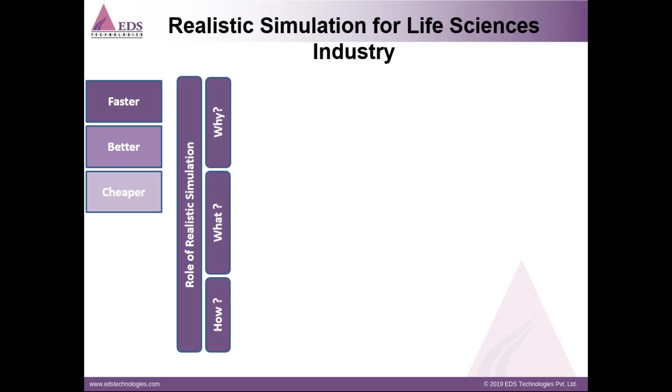All these industry challenges and demands mainly call for shorter time to market, more competitive products, and lower product costs. A realistic simulation can play a significant role in achieving these goals. Simulation can help design exploration by changing the material choices and geometries, and also manufacturing tolerances, to predict the device's durability, reliability, and potential failure due to fatigue.

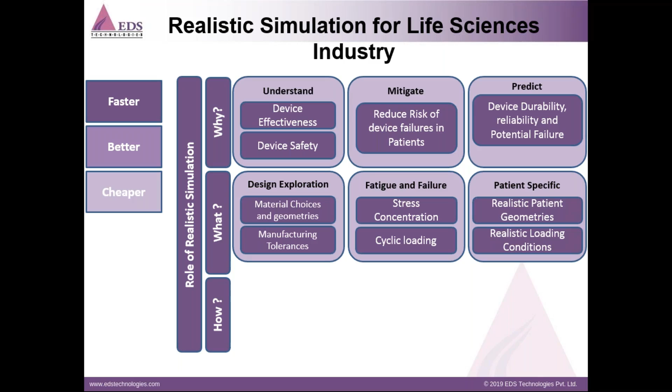To reduce the risk of device failures in patients, patient-specific simulation can be implemented by using realistic patient geometries and realistic loading conditions, and all of this can be achieved by realistic simulation and durability evaluation.

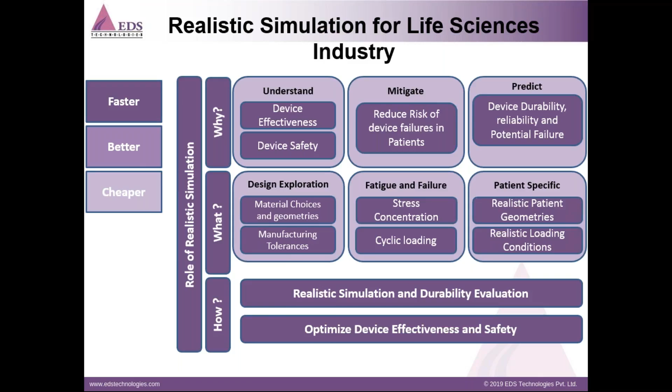Simulia has a large footprint in the medical devices industry, with more than 100 commercial customers that cover mainly various segments within the medical device industries, including but not limited to cardiovascular, orthopedic, drug delivery, vision care, hearing care, surgical equipment, dental, pharmaceutical, medical imaging, as well as wound management.

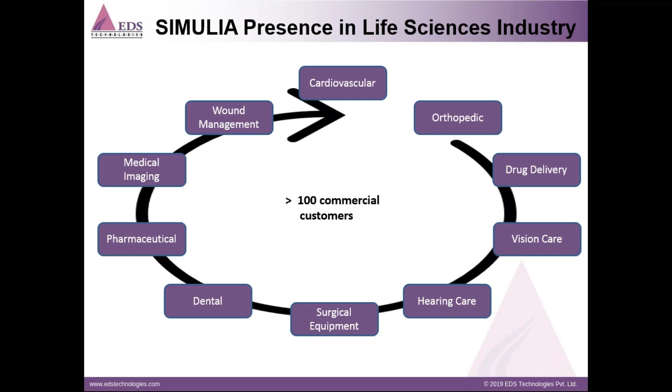Today we are going to talk about stent design optimization, and I will show you a workflow developed for this particular specific process. A design of new coronary stent in all consideration of various performance is critical, including radial stiffness, durability, crimpability of the material, and also manufacturing choices, and many other factors.

So as it is time consuming and expensive to evaluate and optimize a stent design by means of prototyping and physical testing, a computer simulation offers a powerful technique to conduct virtual optimization of stent designs early during the stage of development itself.

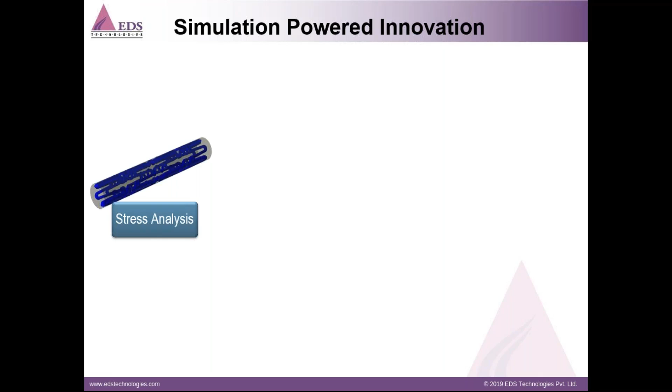In this proof of concept work, a process for optimizing a representative coronary stent model through parametric as well as non-parametric approaches is demonstrated, and the evaluation of design and performance measure of these stents through optimization steps are also discussed here.

So we start with a few of the methods about how to create a stent model to perform a stress analysis and to perform a parametric design optimization in which we can change the geometric properties of the stent, such as the length of the strut, the width of the strut, or the radius of the strut geometry.

Then we will also talk about non-parametric design optimization, in which we are going to show how the shape of the stent structure itself we can change by the non-parametric design optimization tool. And finally, we will talk about the reliability analysis, in which we are going to show how effective the stent is when it is applied in a range of population in which the size of the coronary artery may change from one person to another.

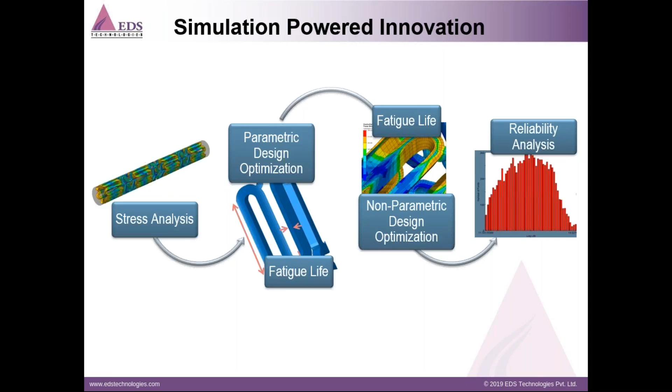And there is a balloon that goes inside the stent. And once the balloon is at the point where the plaque is built up, the balloon is expanded so that the stent expands and it pushes the plaque in, and also it will attach to the wall of the artery.

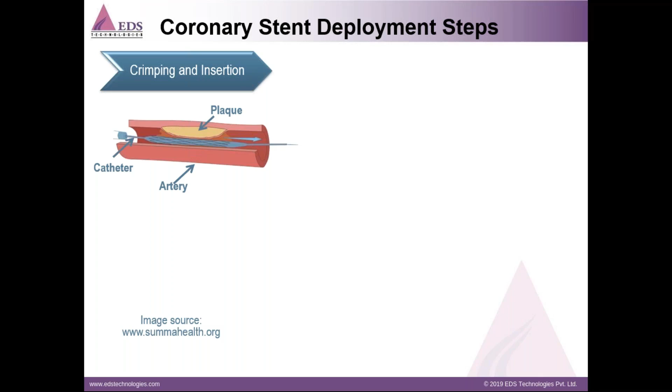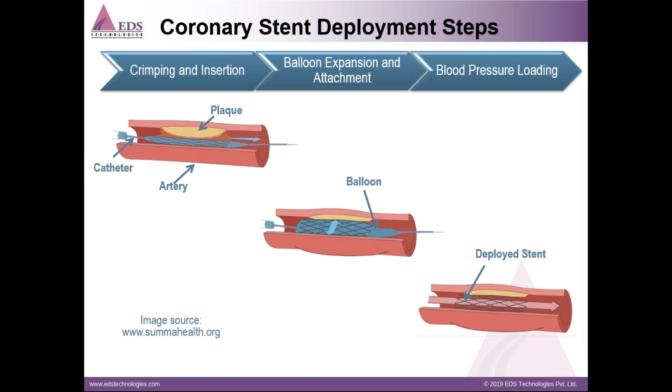So once the stent has been applied, which is attached to the walls of the artery, the balloon is then collapsed and then removed from the artery. And then you will finally end up with a deployed stent. And after that, as the blood flows through the arteries, cyclic loading of pressures, mainly blood pressure, is applied on the arteries as well as the stent over the life of the person.

So now we'll go into the details of the stress analysis section and talk about how the model was built for the stent, and how the analysis was set up. So we will start by creating a 2D sketch of the stent component. Here you can see a U-shaped strut and a connector component. All the geometric features of the 2D sketch here have been parameterized.

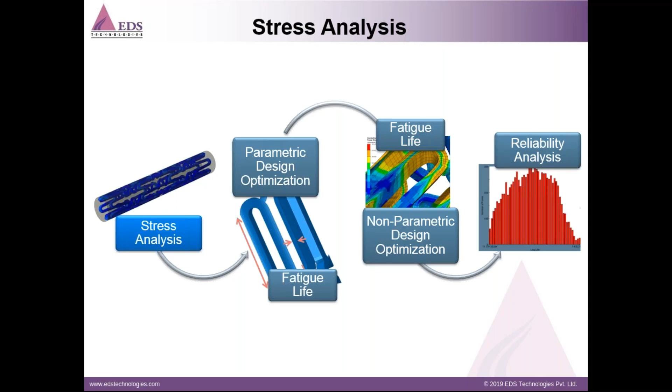So this particular U-shaped strut and the connector element you can see, which we have done through parameterization. All the geometric features of this particular 2D sketch have been parameterized such that the length of the strut, the radius of the strut, and also the thickness of the strut is rightly defined.

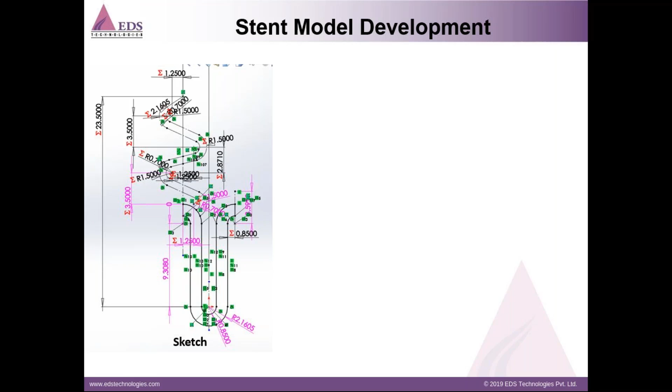Once we have the 2D geometry, it is repeated multiple times to achieve this 2D shape of the strut. Instead of doing the individual modeling, we can repeat it. So once we have the 2D geometry, it's meshed, and the meshing part was done in Abaqus CAE itself. So the geometry was created and then imported inside Abaqus CAE.

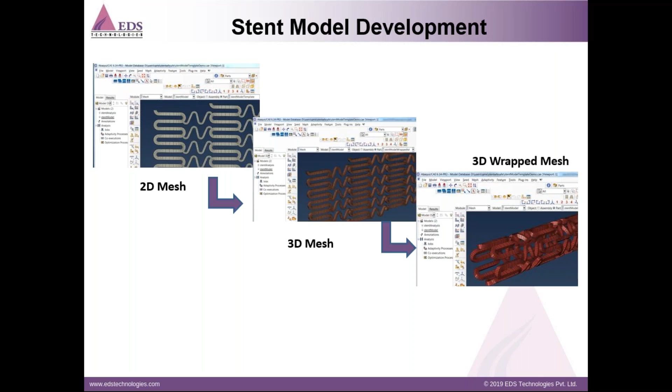Then the 2D mesh is created inside Abaqus CAE, and this 2D mesh is then extruded. And as you can see, it has become a three-dimensional mesh. Once we have the complete mesh of the stent, it's wrapped to create a 3D meshed stent part inside Abaqus CAE. That's what you can see on the rightmost image.

So once we have a wrapped mesh for the 3D stent, you can proceed with setting up the model for the analysis. Further, there are multiple components. The stent itself was modeled using stainless steel, as you can see on the left-hand side, where you can see a stress-strain graph for the material properties.

The artery is modeled as a hollow cylinder, and when it comes to material property, we have defined it as an anisotropic hyperelastic Holzapfel material. So basically, the artery is modeled as a Holzapfel material using an anisotropic hyperelastic material model.

So you can see the bottom graph where you can see the stress-strain curve, and also you can see the material property that is used, and it also matches very well with the experimental data. So this particular experimental data we had for this particular material of the artery.

So apart from that, there are two more components here: the expansion and the crimping devices. One of them is a solid cylinder, modeled as a rigid component that expands or contracts to implement either crimping of the stent or the expanding of the stent.

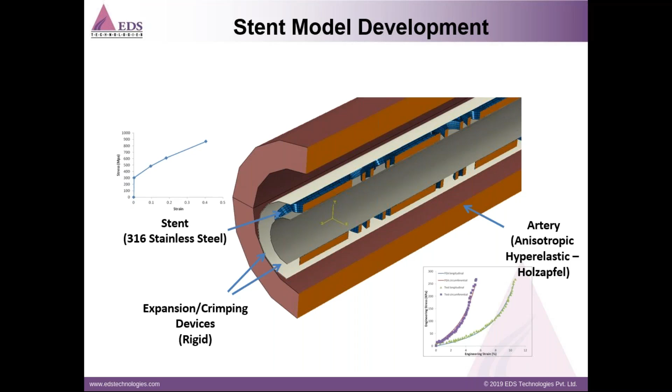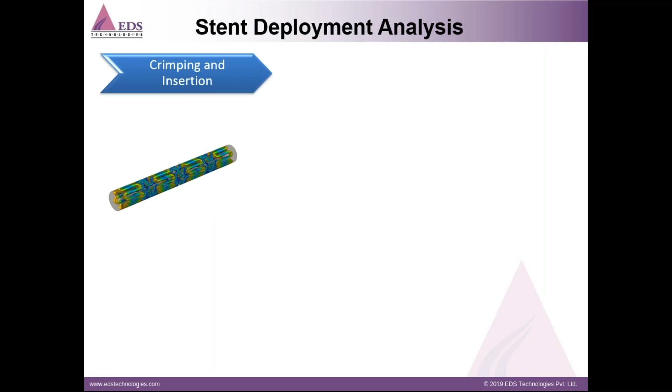So here is a detail of what stent deployment analysis includes. The first step is mainly crimping. Once the stent is manufactured, it is crimped. That is, it is compressed so that it can fit inside the catheter. The same I have shown earlier also, and this particular catheter will be inserted inside the artery. Before it can be deployed, it needs to be compressed so that it can fit inside the catheter, so it becomes smaller.

The next stage is the expansion stage, in which you can see the white component here is a balloon which will expand, and as it comes in contact with the stent component, it will expand. And then once the stent starts to touch the vessel, it kind of deforms the vessel a little bit and attaches to the artery.

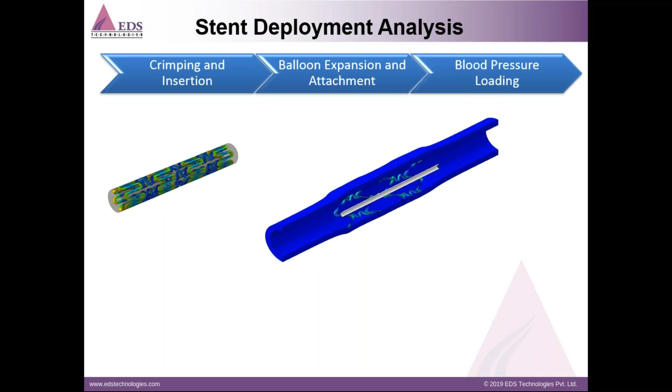On the bottom here, you can see the results of the von Mises stresses on the stent. On the right-hand side, you can see how the blood pressure loading is applied and how it results in the stress in the stent. So once a stent is deployed into the artery, the blood starts to flow, and a cyclic blood pressure is applied to the internal wall of the arteries, and that pressure is also applied on the stent. You can see here on screen that initially the loading is monotonically built up, and then pressure is applied in a cyclic manner.

So this also leads to the stress which is shown in this particular graph as the maximum stress in the stent, and as you can see, as pressure increases and decreases, stress also goes through the same cyclical pattern. And because stress and strain are undergoing this particular cyclic pattern, the fatigue life of the stent can also be estimated.

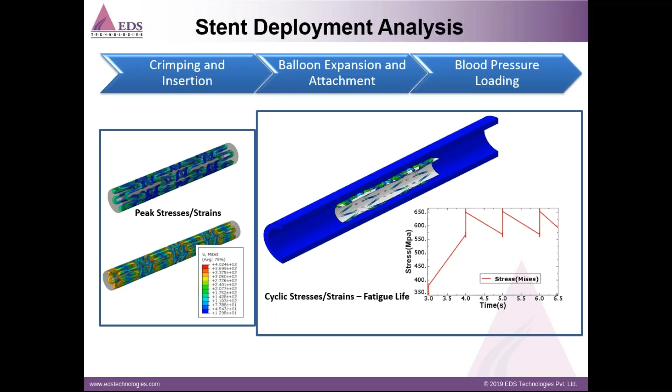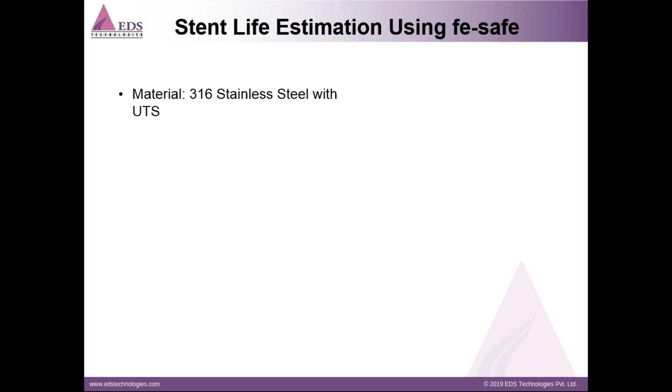The fatigue life estimation using the fe-safe tool is discussed in this particular slide. The material which was used is 316 stainless steel with the ultimate tensile strength. The algorithm used for estimating the fatigue life was Brown-Miller with the critical plane method, for which the Gerber fatigue reserve factor was computed using these equations, which are shown on screen. And estimated infinite life for 2e9 half life cycles, which is approximately 20 years equivalent, was also studied.

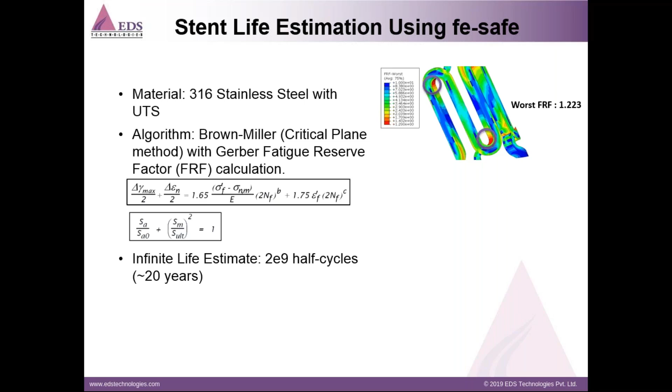The contour plot on the top right shows the fatigue reserve factor, and the regions highlighted in red mainly show the area for which the fatigue factor is the worst. That's the component that is most likely to fail or has the lowest life cycle estimate.

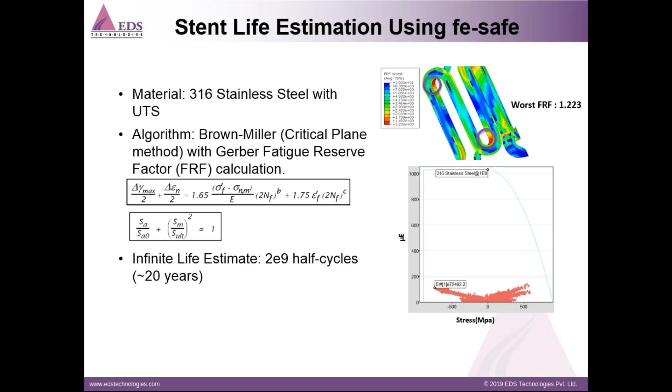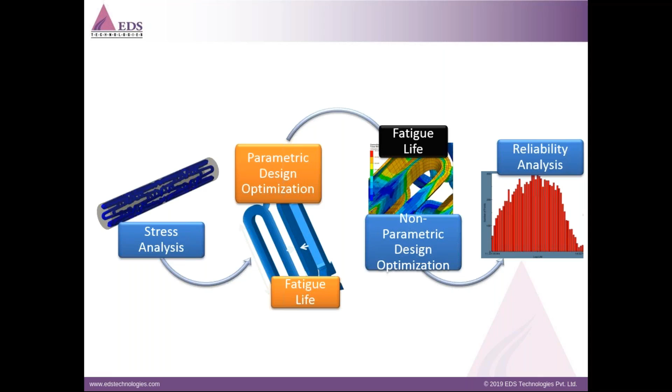So now, next we are going to study how to optimize the shape of the stent. We'll be talking mainly about parametric optimization, or geometric parameters of the stent, like length or shape or thickness, and how we can change them to get a better design.

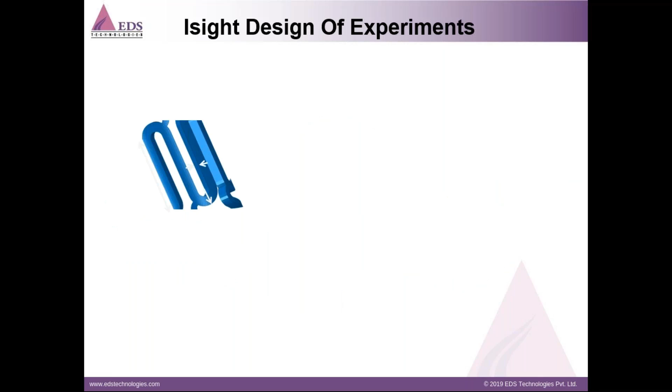So let's talk a little more in detail about the parametric design optimization. It was done using the Isight design of experiments tool. Isight is a process automation and optimization tool from Simulia. For this case, a design of experiments was set up in which the parameters are the length of the strut, the radius of the strut, or even the thickness of the strut.

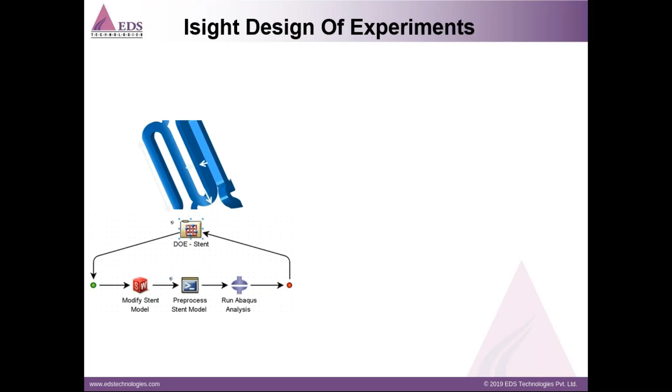The components of the workflow are included, and we can start with modifying the stent model, in which we modified the 2D geometry of the stent in the CAD package, and then from that 2D geometry, the 3D mesh is updated in the Abaqus model, and a new input file is also generated. Then we run the Abaqus analysis and store the maximum stresses that are generated.

So we want to look at the areas for which the stresses are minimum, and those are the sweet spots for the design. That means if you choose those design parameters, the maximum stress will be minimized in the stent. So the result of the design of experiments is that we come up with this particular set of optimized parameters such that the maximum von Mises stress is minimized in the stent.

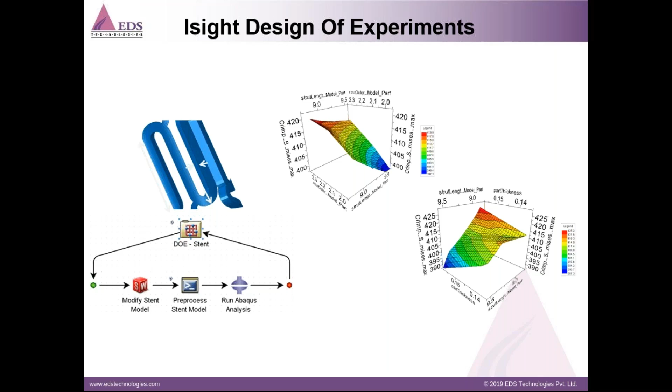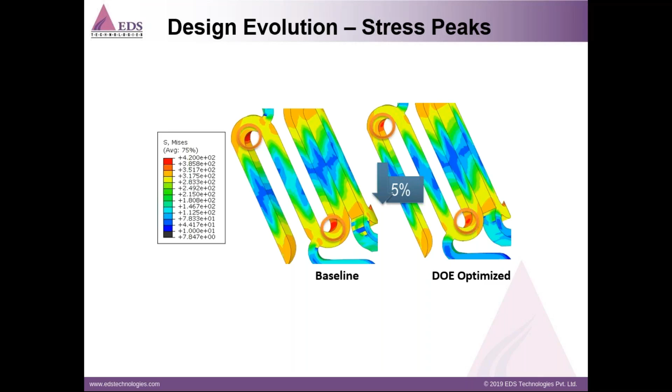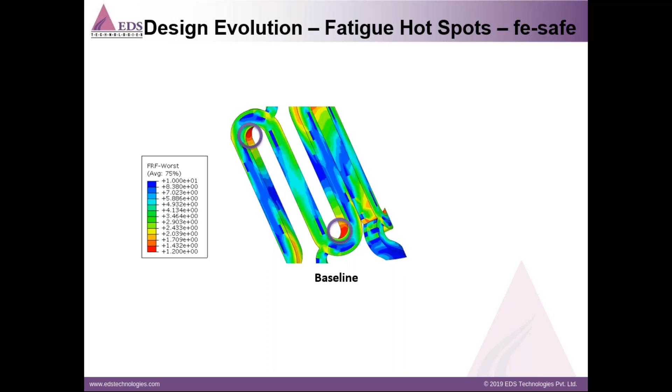The second factor that we want to look at here is a fatigue hotspot. The same region where the stress was higher will also lead to the lowest fatigue factor, and those are the two regions where the fatigue factors are the lowest. After the DOE study, you can see that the optimized stent leads to an 8% improvement in the worst factor in these two highlighted regions. Let's say initially it was 1.2, and it has improved slightly to a larger value.

So far we have talked about how to set up the stress analysis for stent crimping and deployment. We also talked about the parametric design, doing a design of experiments study, and how to change the geometric features of the stent model. Now we are going to talk about the non-parametric design optimization, in which we can slightly change the shape of the stent itself in a non-parametric way. Let us go into detail about that.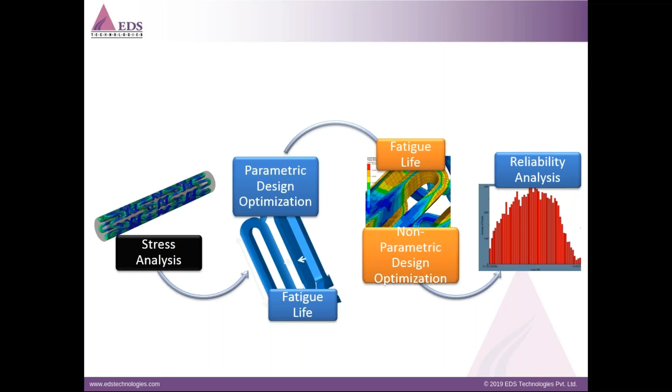Now, the non-parametric design optimization was conducted in Tosca Structure, in which the design areas were specified by picking up the nodes. We picked up the nodes where we saw the maximum stresses and the fatigue hotspots. For the design optimization, we specified those nodes. Here you can see the highlighted nodes in red, which are allowed to deform.

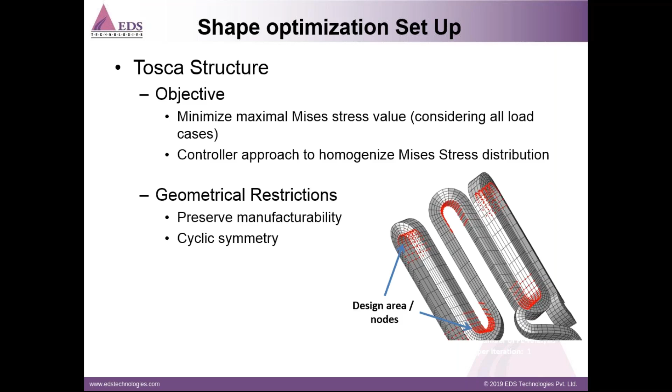The objective of this optimization is to minimize the maximum von Mises stress, considering all the load cases, including crimping, stent deployment, and also the blood pressure loading we need to apply. The approach is mainly to homogenize the von Mises stress distribution so that the maximum stress is reduced. Some geometrical restrictions are also applied so that it is manufacturable and has cyclic symmetry. Cyclic symmetry is also assumed, just like in the other cases.

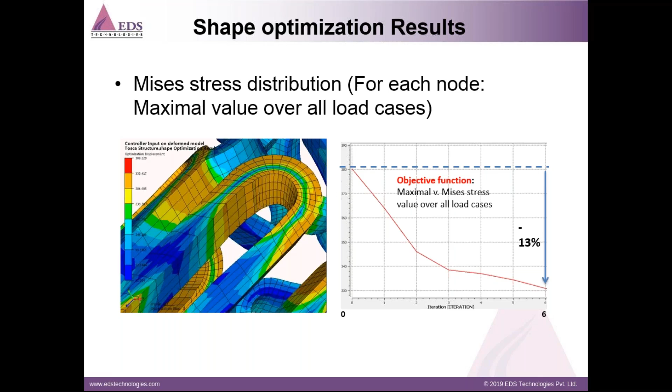So now, in the previous step, we talked about how the shape of the stent changes due to the parametric optimization, by changing the length or the radius of the stent geometry. Now we see how the shape optimization results will change the shape.

So here you can see the lines are no longer straight. You can see more contour on the straight part of the strut here, and also deformation in the U part of the strut you can observe. And it is very clearly visible that we do not have any kind of straight lines on this part.

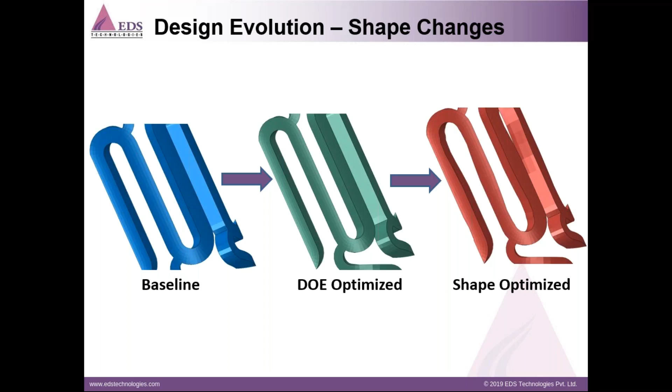So we are also going to look at the fatigue hotspot as well as stress factors here. Let us see how it leads to the overall stress and the fatigue factor. When we did the parametric optimization, it led us to a 5% reduction in the stress peaks, and doing the shape optimization will lead to a 14% reduction in the maximum stress if we compare it with the initial stress value, that is the baseline design.

So this means over 2 steps, the parametric optimization leads to 5%, and then when you are doing a shape optimization, that is non-parametric optimization, it gives a further improvement on the stress peaks.

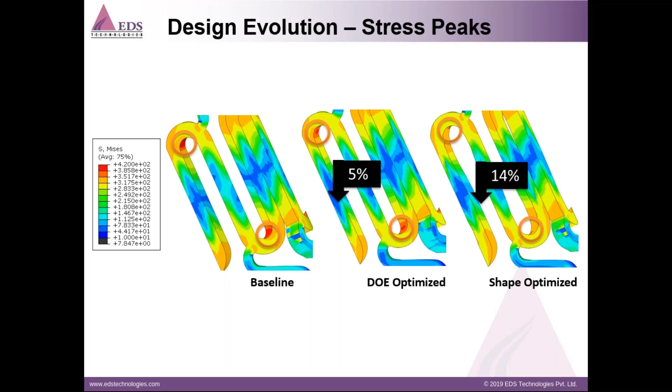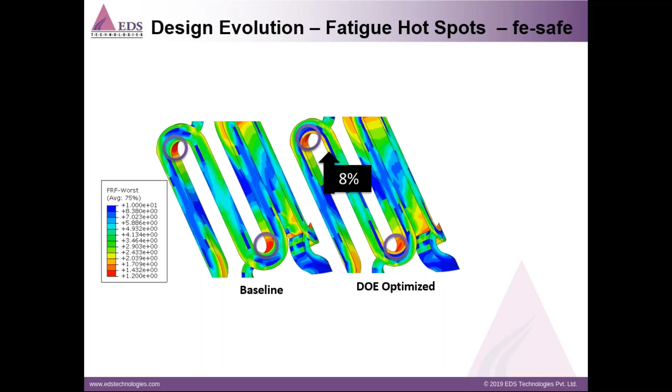We are also going to look at fatigue hotspot factors. Doing a parametric optimization led to an improvement of 8% in the worst fatigue factor, and using the shape optimization, we have improved it by 14%. So we started with a fatigue factor of 1.2 in this region, which is highlighted, and we are ending up with 1.41 as the worst fatigue reserve factor, which is about 14% improvement in the FRF result.

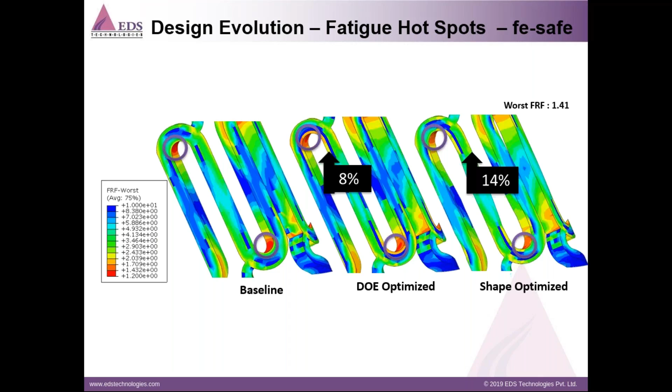So I have shown you these results in 3D, and also wanted to show you in 2D. It's a little better to see how geometry changes in 2D. So we start with this baseline geometry of the stent component, and this is the parametric optimization model in the middle, which has undergone a design of experiment study and optimization, for which you can see the length is slightly longer and the radius is slightly smaller.

And once we do the shape optimization, the shape has been changed quite a bit. The radial shape is slightly deformed, and it is also slightly pushed inwards, and the long straight line, you can see it's more contoured in those regions. And since we had applied cyclic symmetry, you would see that the two U-shaped structures are very similar.

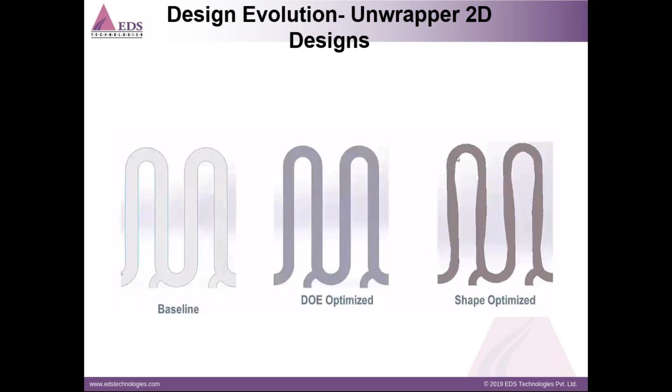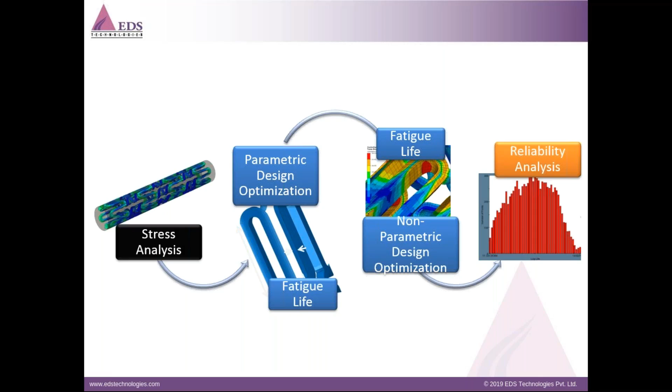So now that we have talked about parametric design and non-parametric design optimization, finally we also need to test for reliability. We want to test the reliability of the stent mainly because the same stent will be deployed in a range of population, for which the size of the arteries might be very different. So that's what we are going to test against: if we change the size of the arteries, how does the performance of the stent change?

So to conduct the reliability studies here, there are mainly two parameters that we will focus on: the inner radius as well as the outer radius of the artery. This way, we change the shape as well as the thickness of the artery. So we are trying nearly 2.5% variation for both the radii.

We are going to keep the outer radius at 1.62 millimeter as the mean and 0.02784 mm as the standard deviation. And when it comes to the inner radius, it is 1.132 millimeter mean and 0.018 millimeter standard deviation.

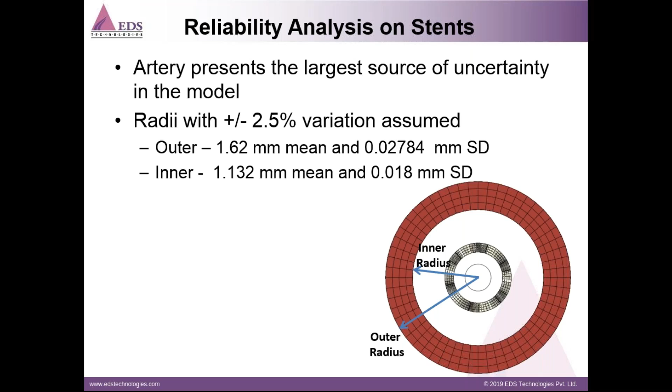So the reliability analysis is conducted using Isight. This is the same tool once again which we had used earlier for a parametric study. This is a process automation tool from Simulia. Different components are included inside the reliability, as you start with the stent model, which is changing the geometric parameters from the artery point of view.

So here you can see the workflow. Initially it will undergo different changes in the stent model, and the same model will be taken for stress analysis, followed by a fatigue life calculation using FE analysis. We'll try to extract the worst life here, and the same will be considered for the DOE reliability.

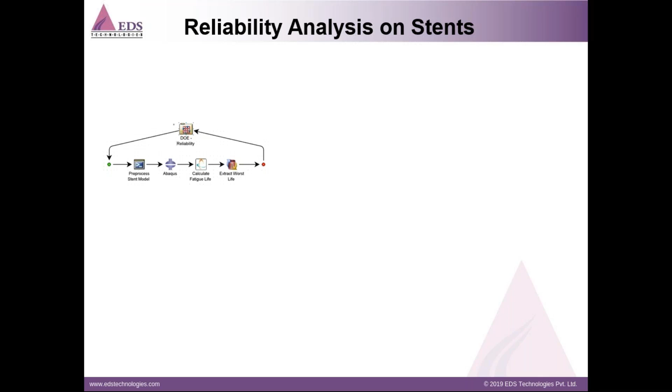So this is the response surface. The response surface will tell you how the worst fatigue factor changes as we change the inner radius and outer radius. That is what you can see here, in a 2.5% range plus and minus. Once we have the response surface, we use it mainly as an approximation tool in which equations will be fit, and

so you can see in this graph on the y-axis a number of points. It will tell you how many points belong to what value and what radius. As you can see, there is a very good bell-shaped curve, and this is the reliability results. What you would see is that for a lot of iterations, each point is a set of one value for inner radius as well as outer radius.

For most of those, the worst factor does not change, and it is in the range of 1.4 to 1.45. So that means for most of the changes in the radii, the worst fatigue factor does not change. That means the optimized stent model we have come up with is very reliable for any changes in the artery dimension, and it's suitable for subject to subject variation in the population for the artery size.

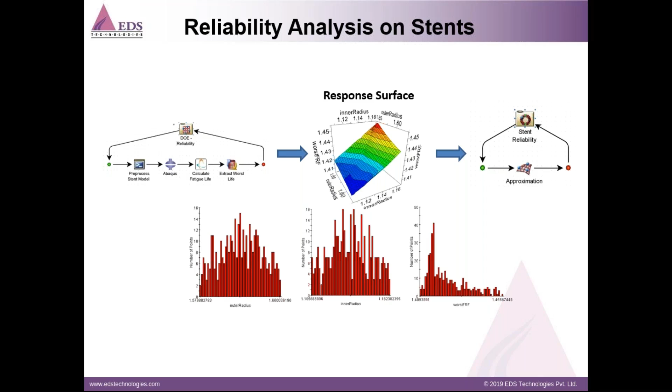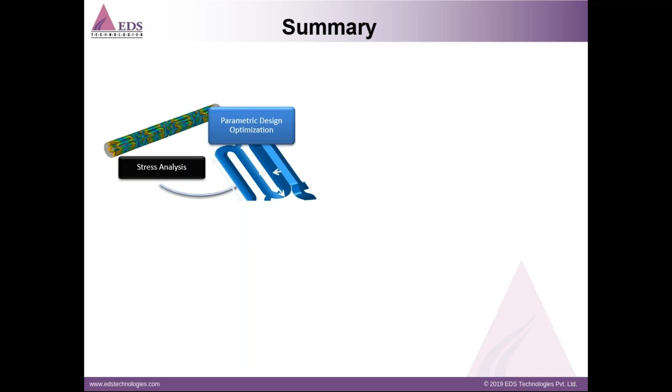Okay, so to summarize, we started by showing you how to conduct a stress analysis for the crimping and deployment of the stent. We talked about parametric design as well as a design of experiment study to reduce the stresses in the stent. And parametric design optimization is used to change the geometry: once you have the initial shape of the stent, how the length as well as width can be changed along with the thickness change.

Then we also talked about non-parametric optimization, where you can see how slight changes in the shape of the stent in a non-parametric way have improved the fatigue factor as well as the stress. And finally, we talked about the reliability analysis, to make sure the new optimized stent is also a viable option across multiple subject populations, so that for different artery sizes, the same stent should work without any problem.

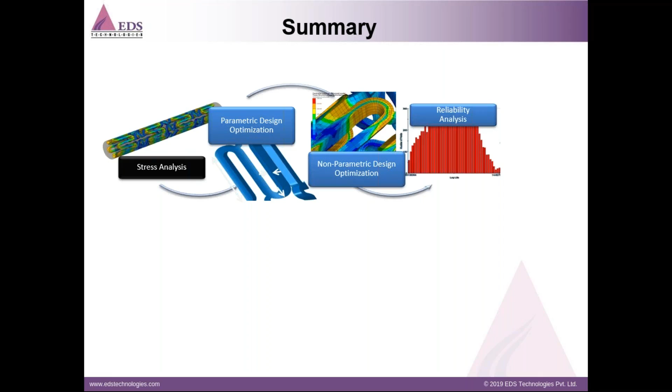So all these analyses we have done using Simulia products. We have used Abaqus for stress analysis, fe-safe for fatigue simulation, Isight for parametric study as well as reliability analysis, and Tosca Structure for non-parametric design optimization. And all these four softwares have been tightly integrated to find the optimum design of the stent.